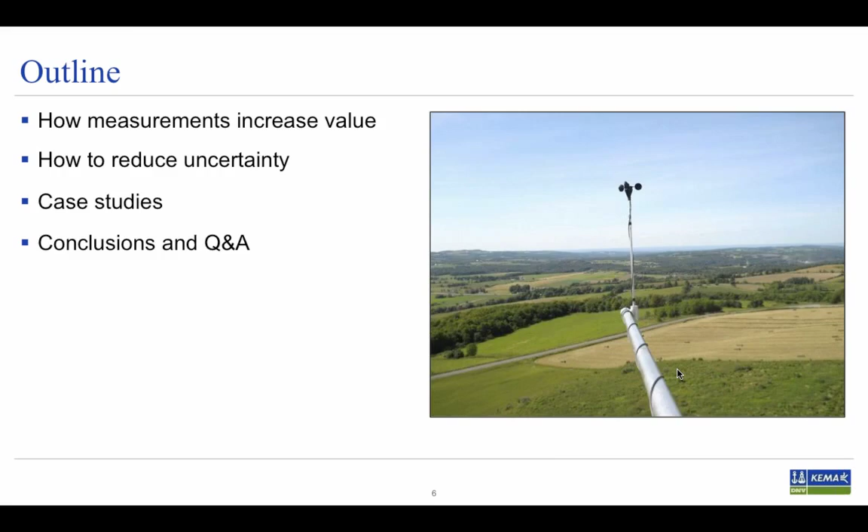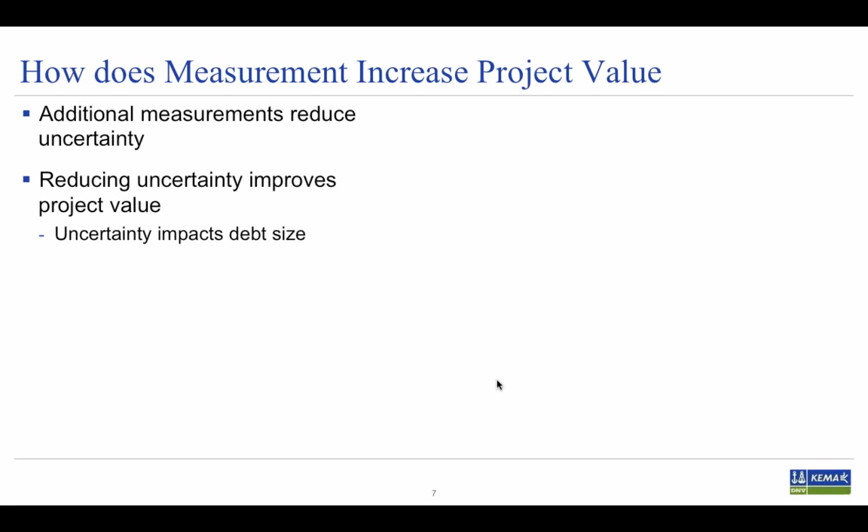So how does measurement increase project value? It does so because when you add measurements, you reduce uncertainty, and when you reduce uncertainty, this improves project value. Specifically, if you're financing a project, uncertainty impacts the debt size.

Specifically, typically a debt service coverage ratio of 1 is required at the one-year P99 level. So what that means is if you produce the energy production at the one-year P99 level, the revenue that comes from that level is matched to the amount of debt to be paid for your debt payments, for a particular size. So when those two factors match, you have a debt service coverage ratio of 1. So if you can reduce your uncertainty, additional measurements will increase the P99 to the next level.

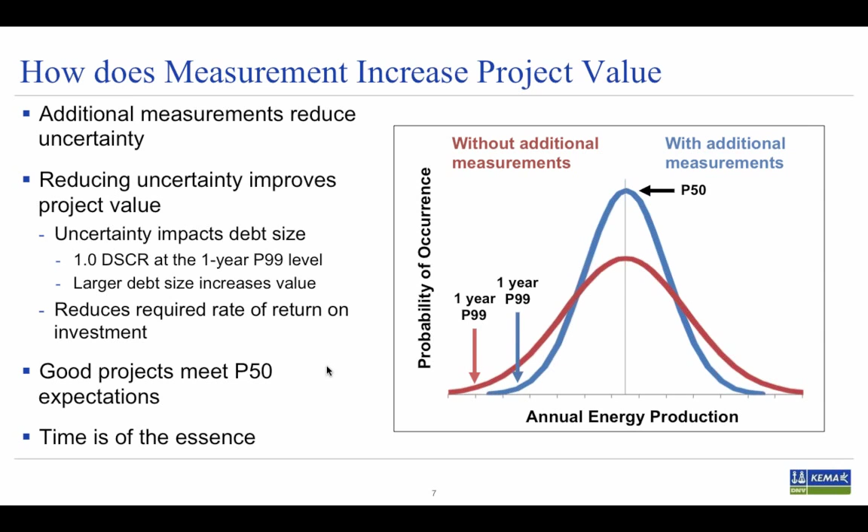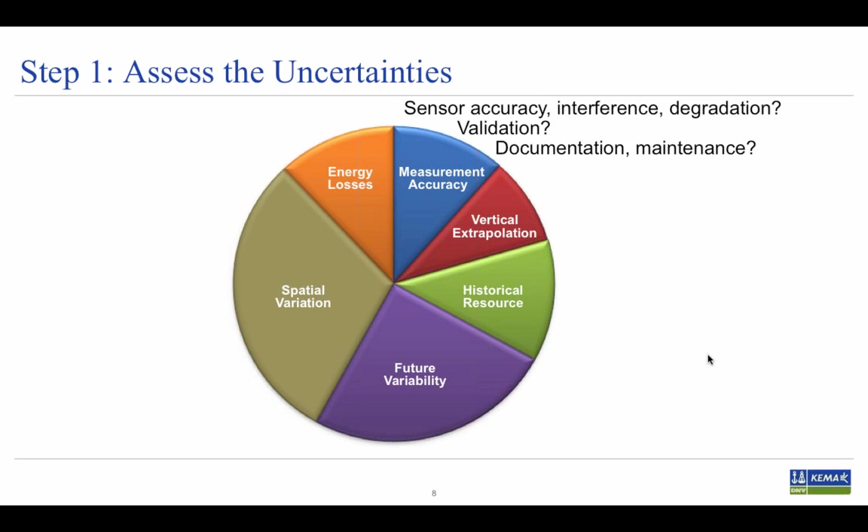First, looking at the measurement accuracy, you'll ask a few questions: What is the sensor accuracy? What interference might I have from tower effects or echoes from a SODAR, or is there any degradation? That will help define what the uncertainty is in the measurement accuracy. You'll also look at what validation method was used, check the documentation to see if it was well done and if there was maintenance, and that will help identify the uncertainty for that category.

The next category is the vertical extrapolation. This is the uncertainty associated with estimating the wind at the heights that you're extracting energy from. So you'll ask: what are the measurements at height relative to the hub height? What's the uncertainty in that estimate and extrapolation? And how well do I know the conditions across the rotor? Do I have measurements for that?

The historical wind resource uncertainty is associated with estimating the long-term average wind speed. You'll want to assess this through the measurement duration you have on site. You may be using correlation to reference data to extend your wind period to represent a longer-term average, and you'll want to make sure that's a consistent reference site.

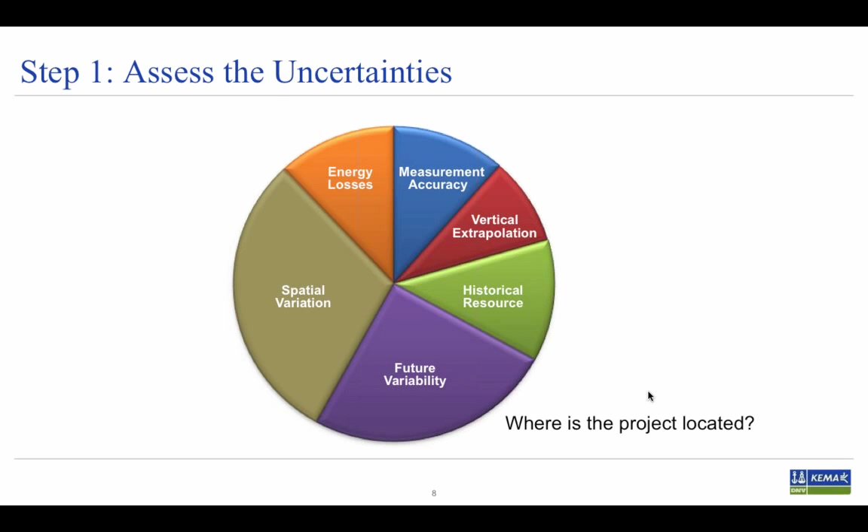Future variability is another uncertainty. It represents the fact that we don't know what the wind will be next year—it could be a high or low wind year, which adds uncertainty to the energy production estimate. It's usually defined based on where the project is located, since certain regions tend to have higher or lower annual variability.

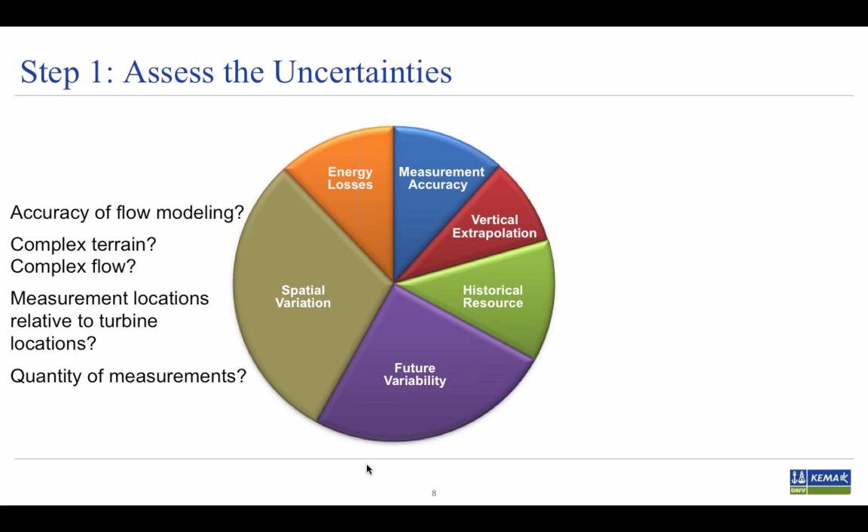The next category is spatial variation. This is the uncertainty of estimating the wind flow across the project. It's dependent on the quantity of measurements and how representative those measurements are of the project and turbine locations. You'll also consider the complexity of the terrain and flow, and the accuracy of your flow modeling to assess this uncertainty.

Energy losses are another uncertainty. You'll look at all the losses here and determine what uncertainty exists around those factors.

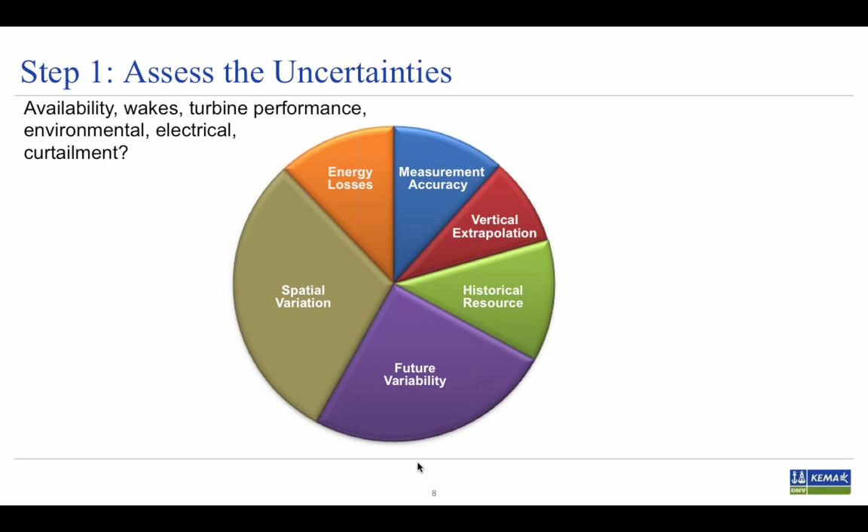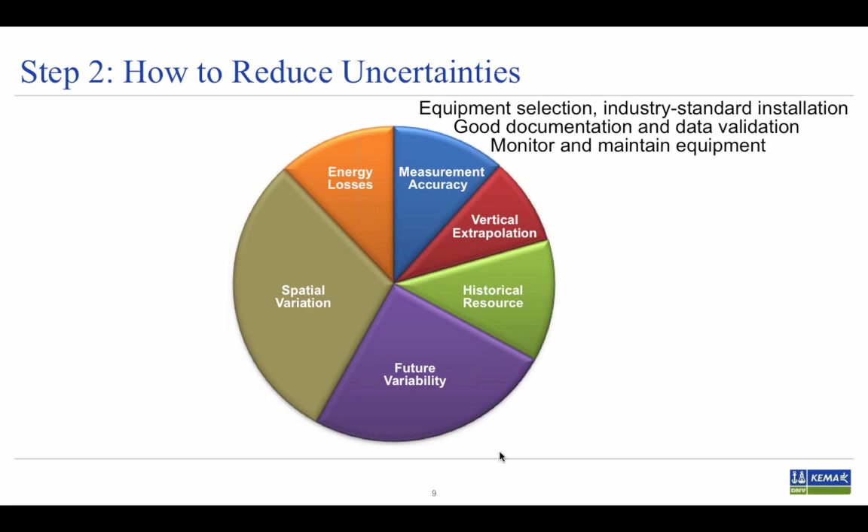Once you've assessed the uncertainty, you'll want to look at what you can do to reduce it—that's step 2. For measurement accuracy, things you can do include properly selecting equipment for your site, using industry standard installation techniques, ensuring good documentation and sound data validation, and monitoring and maintaining the equipment. That's how you would address that issue.

To reduce vertical extrapolation uncertainty, you'll want to make sure you're measuring higher and across the rotor—that's the best way to reduce it.

The uncertainty of estimating the long-term wind resource is addressed by measuring longer. It can also help to overlap your measurements with other towers nearby. For example, if a few miles away you have a project under development with a 7-year tower, you'll want to overlap those measurements in time at your new site so they can be used to extend the period of record.

With regard to future variability, you can't do anything about it—it's not within your control. The wind will change, and that's just a matter of fact, so you identify it and move on.

But you can address spatial variation, and you do that by measuring in more locations and measuring in representative locations.

With regard to energy losses, that's a hard uncertainty to address in the pre-construction phase. What helps is measuring across the rotor, since that gives more information into what the wake losses will be at the site—knowing those conditions helps. Otherwise, a lot of these energy loss uncertainties are mitigated contractually.

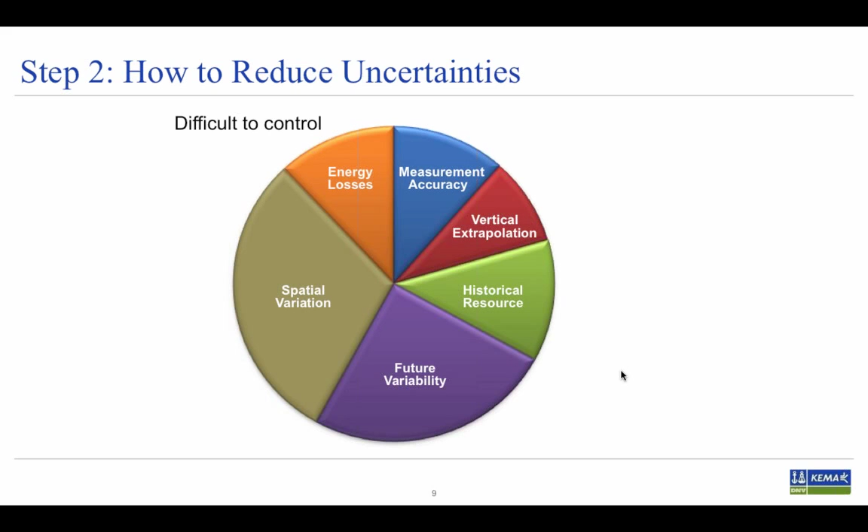So now you know what you can do to reduce uncertainty. How do you get to a good, effective plan? Step 3 is to focus on reducing the largest uncertainties, because that's where you'll get the most value out of this process.

On the left here is a pie chart showing a breakdown of wind speed uncertainties for a particular project. In this case, there's a large spatial variation uncertainty. When you look at how that spatial variation uncertainty impacts the overall energy uncertainty, you get a pie chart that looks like this—you can see the spatial variation uncertainty has grown its piece of the pie.

Why is that? When you combine uncertainties on wind speed, you square them. When you square big numbers, they get bigger; when you square small numbers, they get a little bigger, but not as much. That's how larger uncertainties end up having a disproportionately large impact on overall energy uncertainty. So for this site, addressing the spatial variation will get you the most uncertainty reduction and the most value.

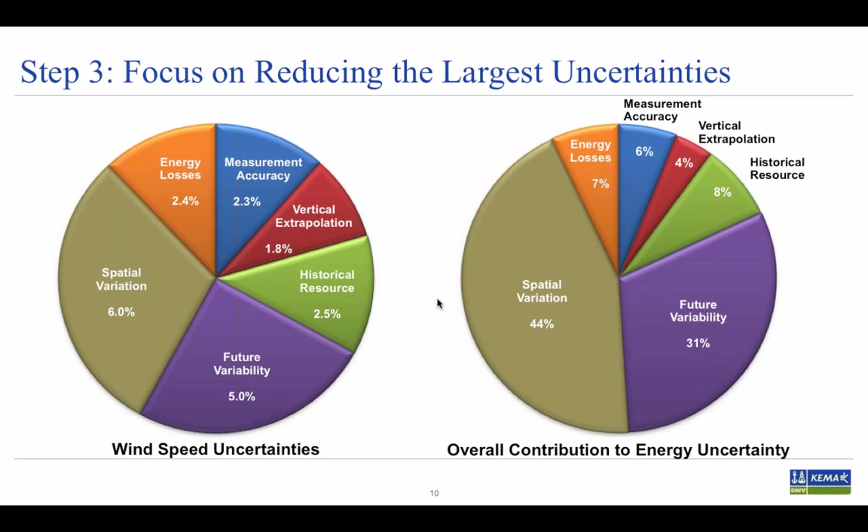Before getting into some case studies, let's dig a little deeper into vertical extrapolation and spatial variation uncertainty, since these tend to be the largest uncertainties for projects, but also the ones you have the most control over and can reduce through measurement. Vertical extrapolation is becoming a bigger issue, mainly driven by the fact that shear and veer across the rotor are now better understood through tall towers, SODARs, and LIDARs.

And what we're seeing is that there are some pretty interesting shear profiles that are going to affect the production. And if you don't measure that, you won't know what the production is going to be like.

So as we're seeing taller hub heights and larger rotors, this effect is exacerbated a little bit. As illustrated in the figure on the right, the Met Tower, 60 meters in this case, only reaches a fraction of the rotor span of this 100-meter hub height tower.

So you would probably estimate a shear profile that looks like this, but in actuality, it might look more like this. In certain conditions, particularly stable conditions, we're seeing that the shear profile we would typically estimate isn't what is actually going on. So you'll want to make sure you have measured that so you can account for it properly.

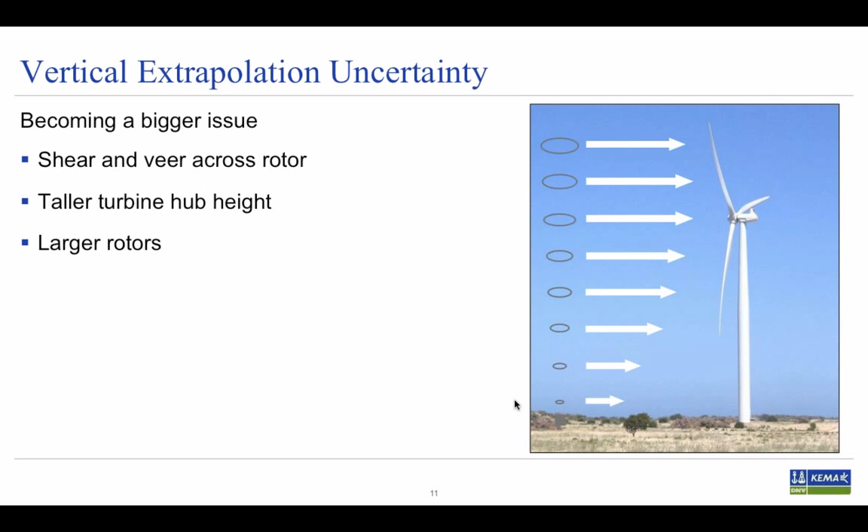Another important uncertainty is the spatial variation. It's one that tends to be large at some projects, and you can address it by adding more measurement locations. We estimate the flow across the site using modeling, but those models will need good inputs, so that's why you'll need to measure in multiple places.

Modeling is good, but it can't do miracles. So that's why we really encourage measurements in order to get any reduction in that category.

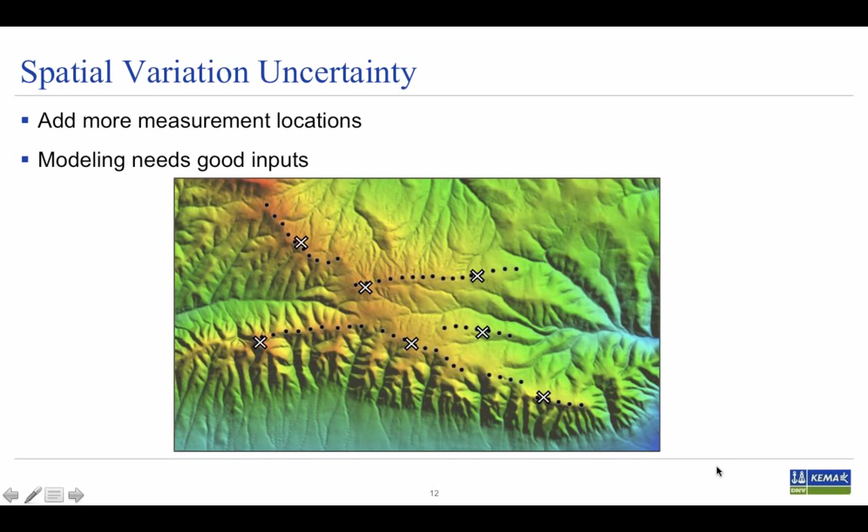So let's take a look at some scenarios and case studies. We'll look at two: one is a Midwest site with a 100-meter hub height, and the other is a complex terrain site.

We will look at assessing the uncertainties. That's step one of the existing campaign: what's the situation, and then start looking at what can we do about it. How can we assess the potential measurement scenarios, and what uncertainty reduction will be achieved through those cases.

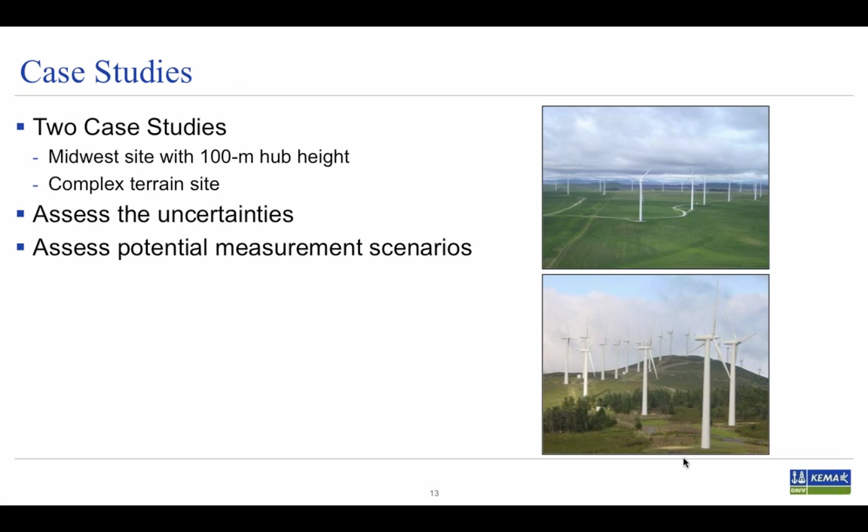We'll put that uncertainty reduction in a pro forma model and see how it changes the debt size and net present value.

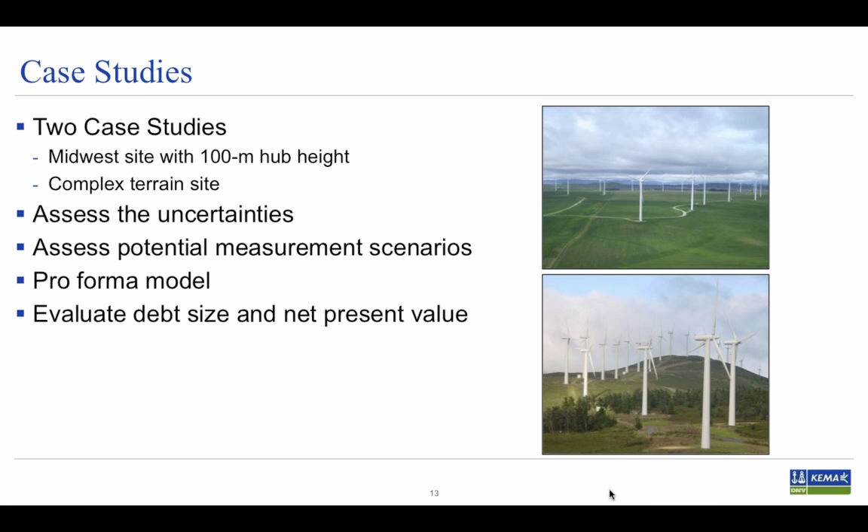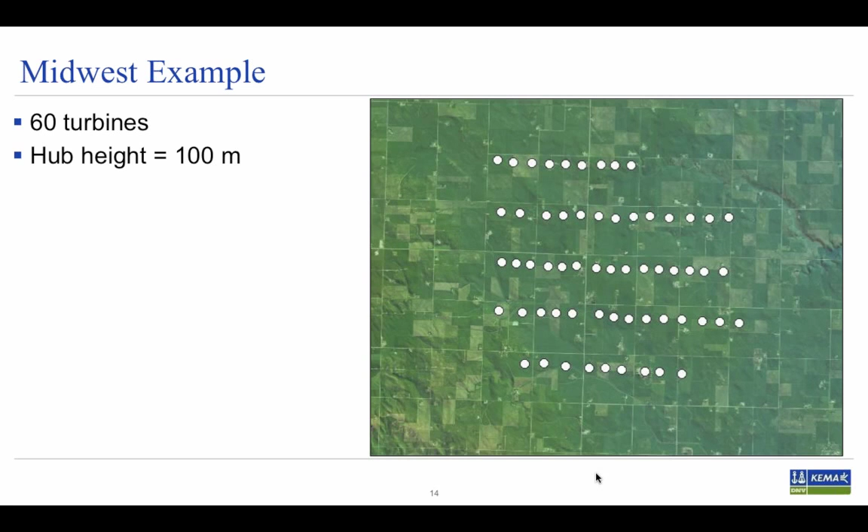So let's get started. The Midwest example is a 60-turbine project. The layout is shown on the right. It's a 100-meter hub height.

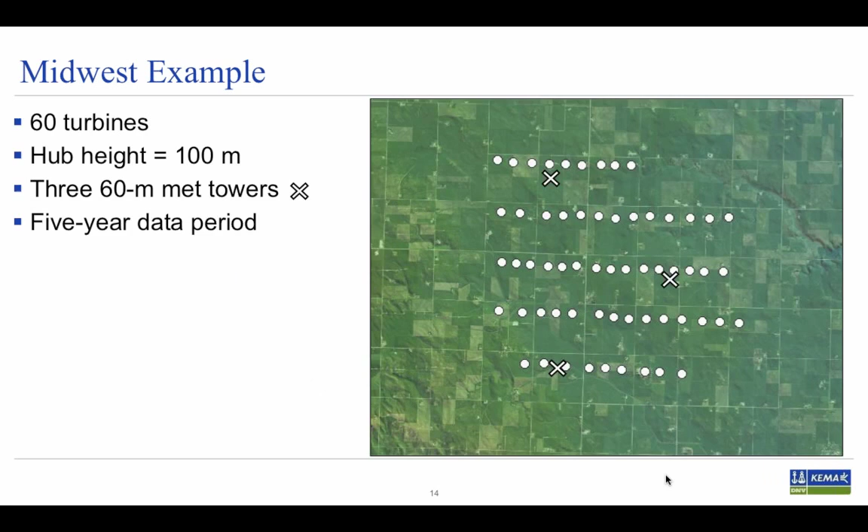Your first step will be to look at the overall uncertainties for this project. So here's the breakdown of uncertainties for this project. You would like to address the largest uncertainty because that's where you get the most value.

But unfortunately, it's the future variability uncertainty. You can't do anything about that. So you're going to look elsewhere.

The historical resource uncertainty is the next largest, but you've decided you're going to get this in the ground or start it this year to get the PTC. So you can't do much about that other than wait.

And then the vertical extrapolation uncertainty is pretty high here. So let's address that. And how can you do that?

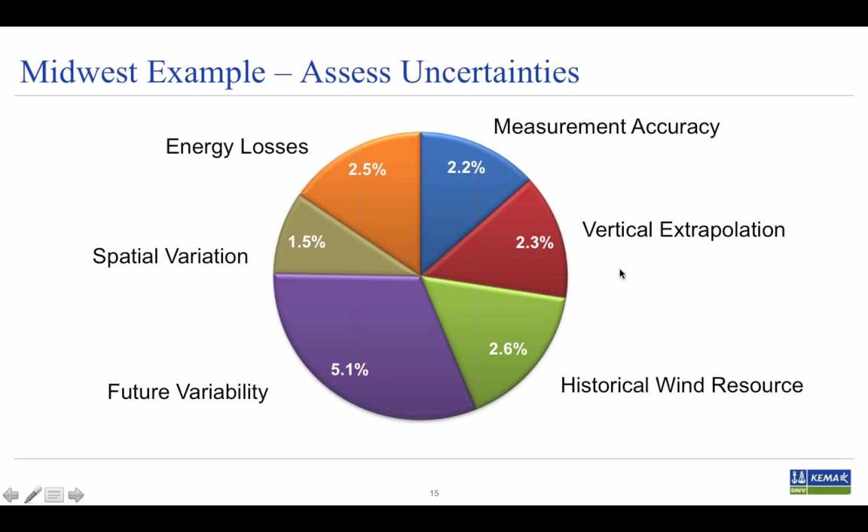Let's look at some measurement scenarios. You can do nothing, just continue measuring with your existing campaign, which would be the base case scenario that we'll compare against. Or you can install a 100-meter hub height tower at this location.

You might be planning to do this already because you're going to conduct a power performance test, and so you're going to need that hub height tower anyway. Or you may want that tower to be the SCADA tower for operations.

Another scenario, you could look at renting a SODAR for a year and putting it here. It could also turn into something that you use for the operations phase.

Or there's a third option: maybe you just want a shorter rental and see what that looks like if you just rent the SODAR for 6 months. So those are the scenarios. Let's look at the results.

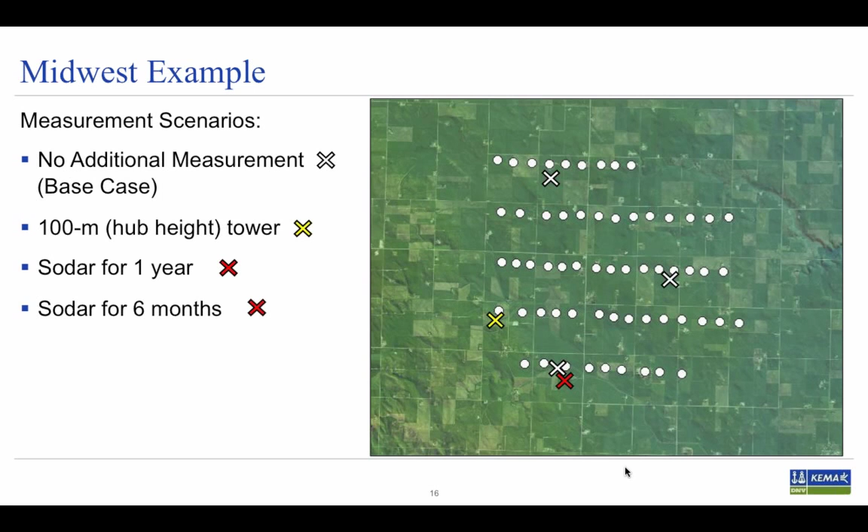What is shown on this plot is the incremental cost that you spent for the measurements, including the equipment and the analysis and monitoring, and then the incremental value, or the change in net present value compared to the base case, shown in the red bar.

You can see the shorter term 6-month measurement had less than half the value, but it's also lower in cost. The Met Tower and the SODAR had very similar change in value and a little bit different cost.

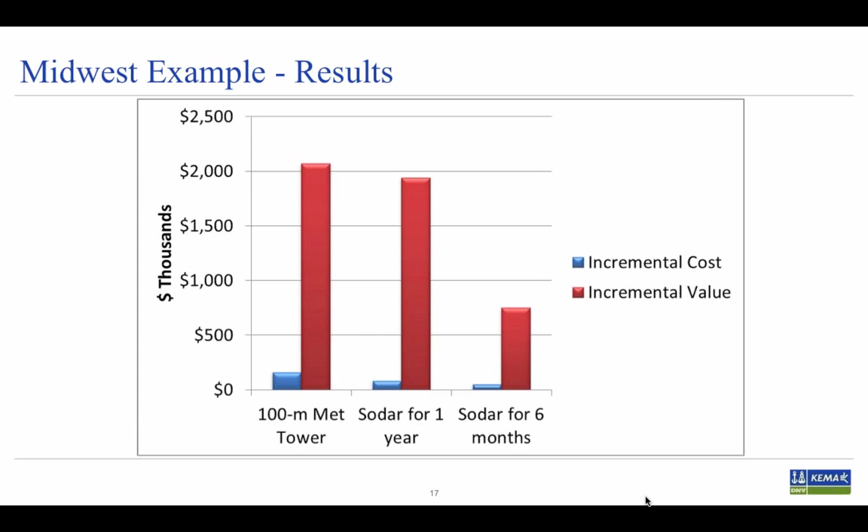You can see this presented in the next table. The top two rows are the values you saw for the chart before. The third row is the P99 P50 ratio, and you can see it didn't change much for the different scenarios, but little changes had quite a big impact on the debt size.

So here's the change in debt size in the last row relative to the base case. I'll get to the assumptions and the costs that we use in these scenarios at the end, but wanted to show you where we're going with this. So that's the Midwest example.

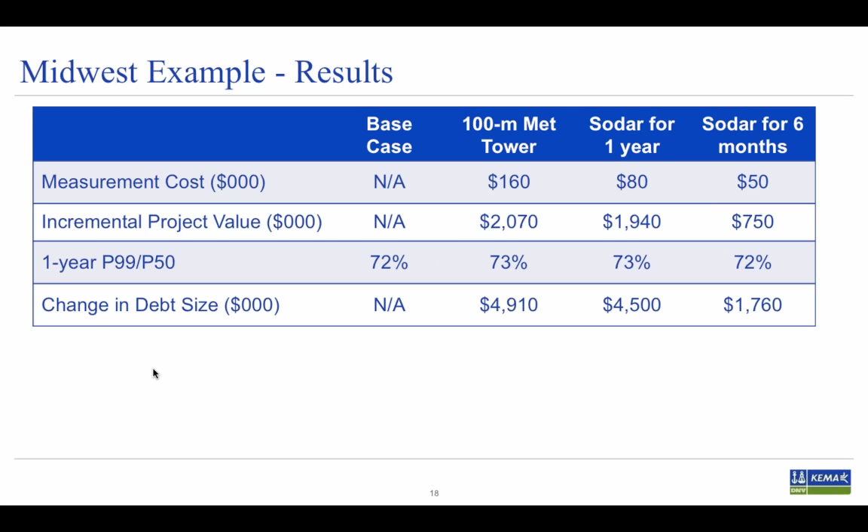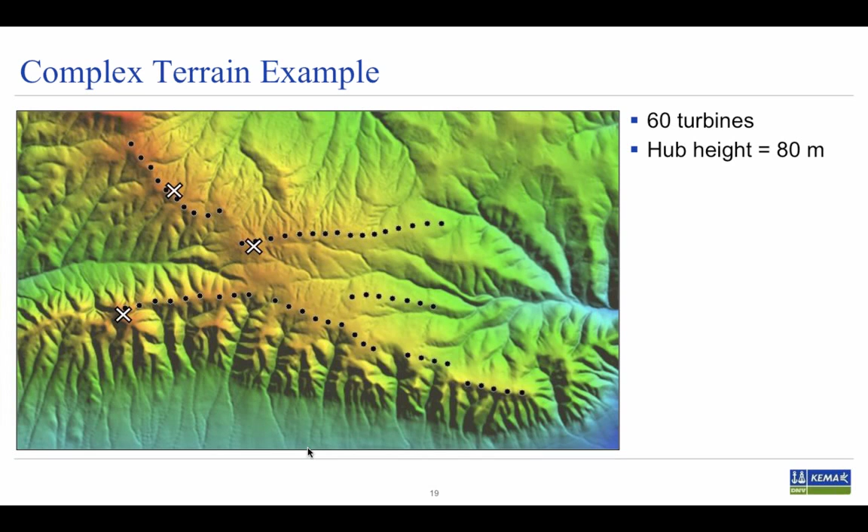Here's the complex terrain example. You have a project that looks like this, and there are three Met towers, 60 turbines, hub height of 80. They're all 60-meter towers so far. And you have a 2-year period at each of the towers, and you've been able to use a reference data set to extend that.

You might look at this case and say, wow, they really haven't characterized what's going on at the site, and you're exactly right. You might think, oh, well, this isn't a common case. In reality, we have seen projects with inadequate measurements going to financing, and they're not getting all the value out of it that they could. So while this may look like an odd example, it's not that uncommon, unfortunately.

You also get into this kind of situation where you have a few Met towers that don't fully represent the project when your layout changes due to environmental restrictions in one area where you plan on developing, or landowner restrictions. So your measurements should often move along with your layout as it changes.

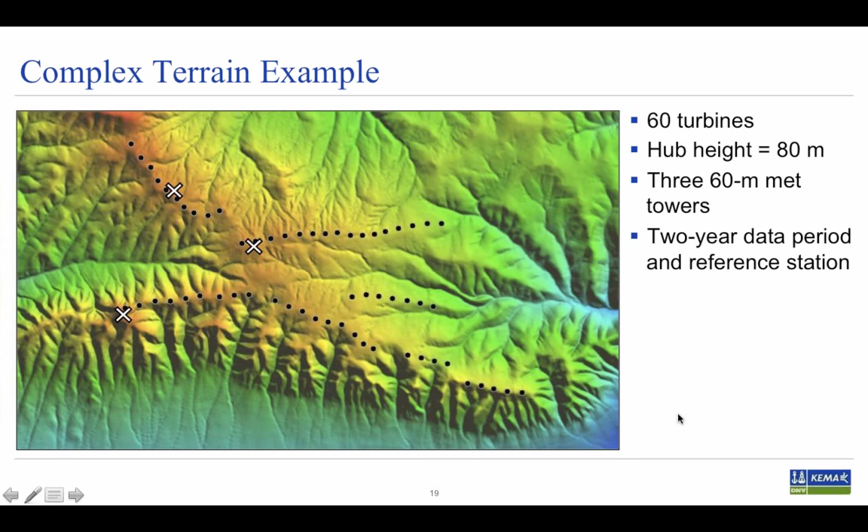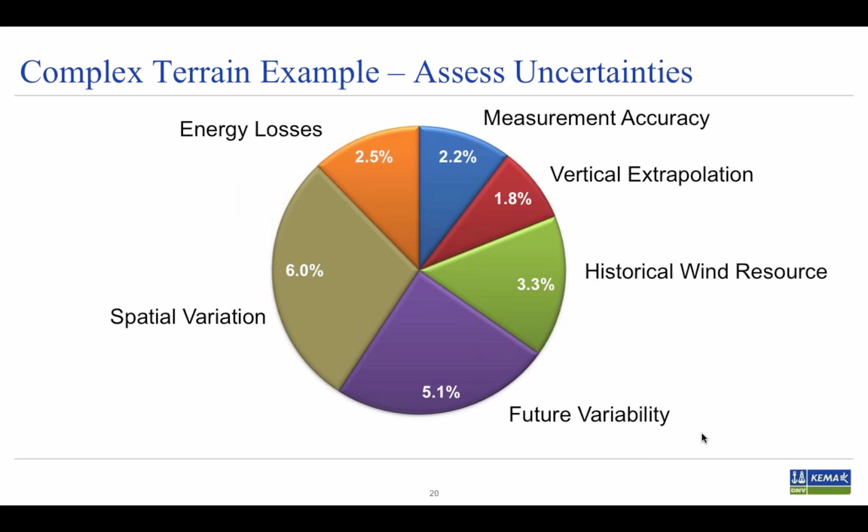But how would we deal with this project? How would we get more value out of it? We first start by assessing the uncertainties. In this case, the spatial variation is the largest uncertainty, so you're going to try to address that. And we'll go through the measurement scenarios that you would do to address that.

In this case, we're looking at installing one additional measurement, or two, or three, or four measurements. These measurements could be towers, SODARs, LIDARs, depending on what you've got going at your site, the conditions — you might pick one over the other. In this scenario, I'll go through the Met Tower case. If you just added one to four 60-meter Met towers, how does that change your project value?

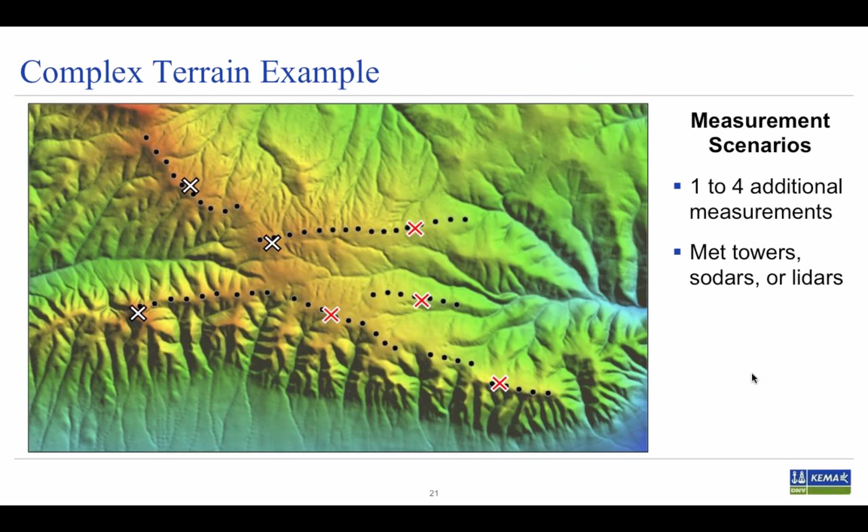It's really hard to put down cost and measurements up front, particularly if you're not sure the project's going to go through. But in a lot of these cases, when you're getting close to building a project and you're confident it's going to go through, putting that cost into measurement, while it is at risk, it's not that much of a risk. So especially as you're getting close to finishing a project is when you want to start thinking about what measurements can I throw at it to eke out that last bit of value?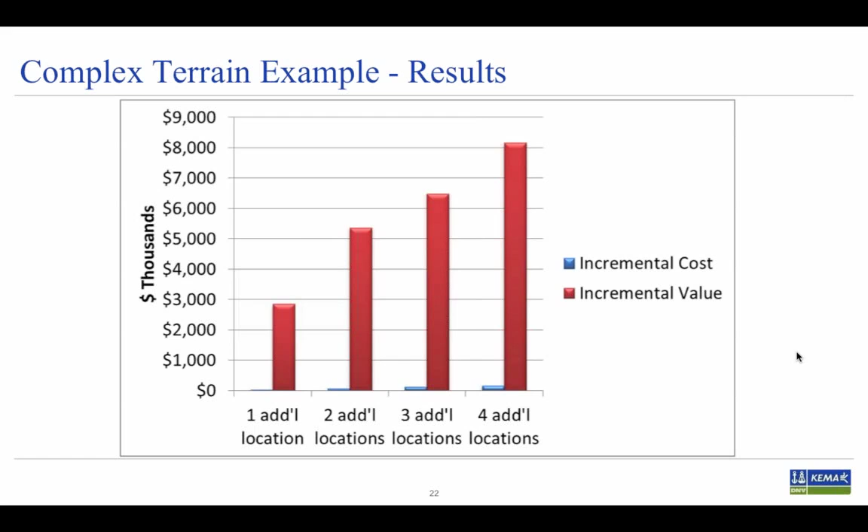This next table shows these values for the plot. Here you can see the P99, P50 ratio changed a little bit more in each case because we started with a pretty uncertain project and was able to continue to reduce that uncertainty. And we're also showing the change in debt size relative to the base case. So you can look at these if you'd like.

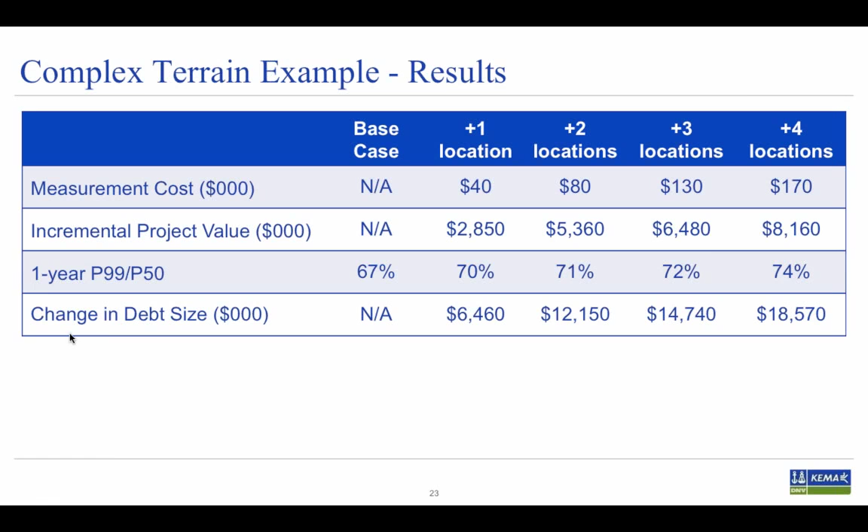There are diminishing returns to this. You could measure at every turbine location, and that would be great, but expensive, and at some point you start losing the value. So this plot shows that with each additional measurement, your uncertainty is reducing to a point. At about 4 or 5 additional towers, in this case, or SODARs or LIDARs, you wouldn't be reducing the uncertainty that much more with each additional measurement.

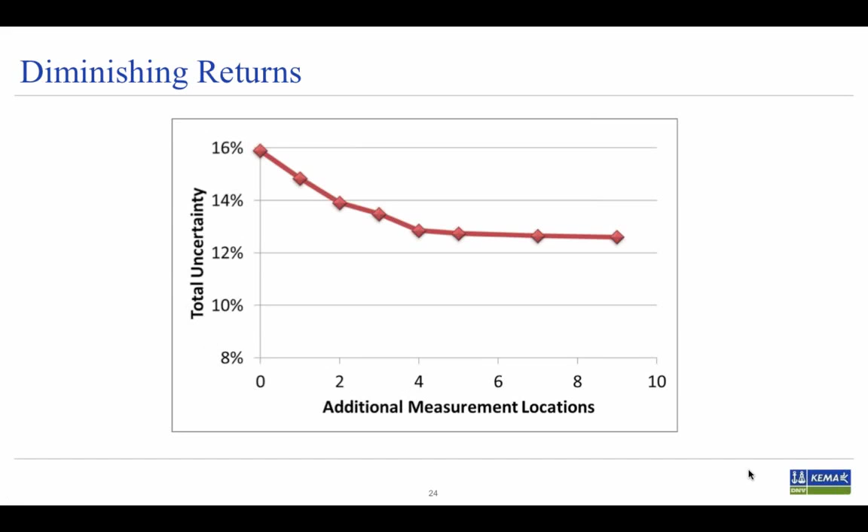And why that is — you're probably reducing the spatial variation uncertainty, but you're running into some other uncertainty that you're not addressing. So you've gone from the spatial variation uncertainty driving the uncertainty analysis to some other factor. So you might start looking at that. But there are other reasons why you would have potentially diminishing returns. And this plot shows the change in your P99, P50 ratio on the x-axis.

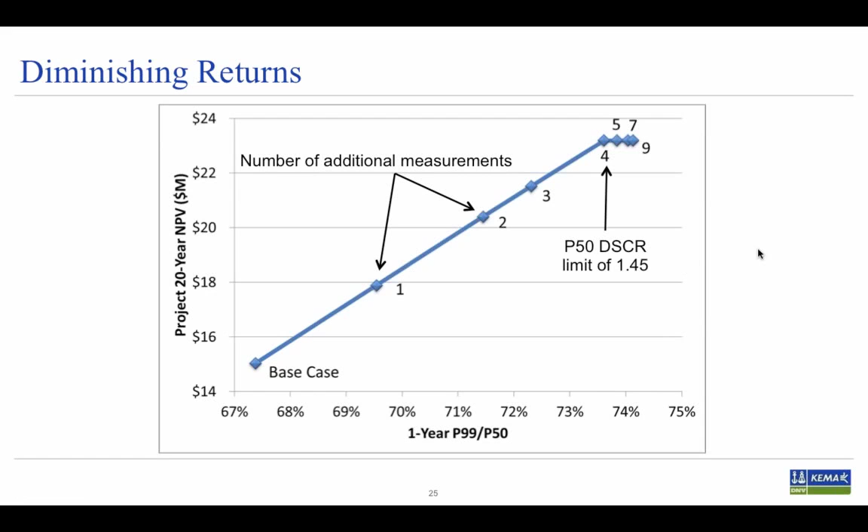So here are the assumptions I promised you on our cost-benefit analysis. It's a 20-year project life, leveraged IRR of 14%, a discount rate of 12% for the values we showed you here. But we looked at a broad range of discount rates, and in those cases, the value of the measurements was positive over that range of discount rates. But it's something you want to look at on a case-by-case basis. We talked about the debt service coverage ratio limits. We used a 5.5% interest rate and a debt term of 17 years.

The cost assumptions are shown here, and then we provide a kind of typical industry range. Of course, these costs will really vary based on the location, what you're buying, all sorts of things, but we wanted to give you some information you could reference if you wanted to get a sense for variation in costs.

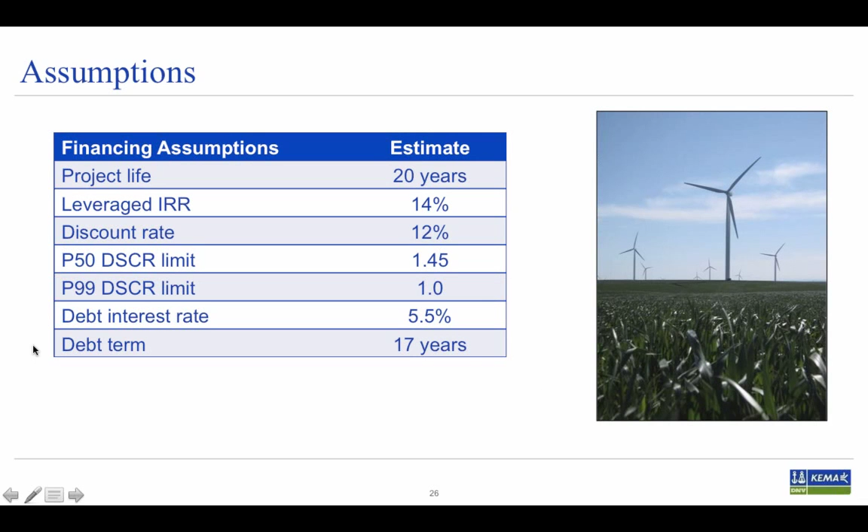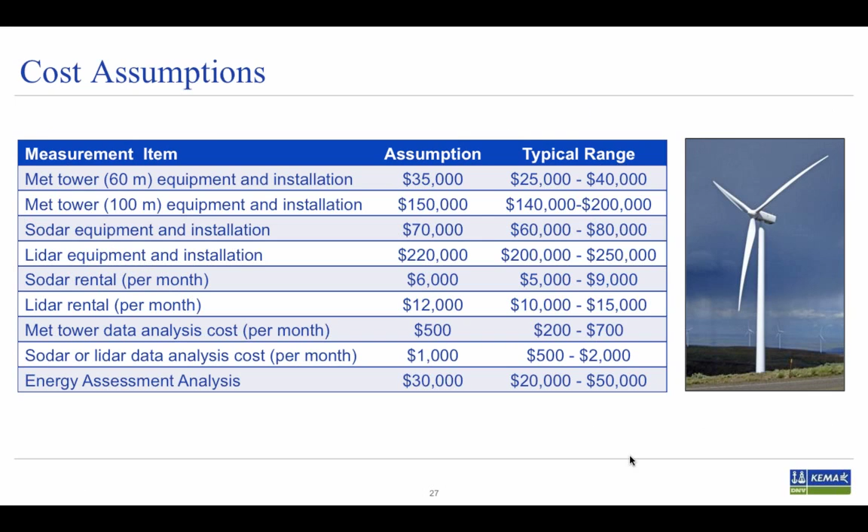And now the key takeaways, things I want you to come away with. The step to how you improve your project value is you first start by assessing the uncertainty. You'll then want to focus on reducing the largest uncertainty. That's the most effective approach. And how you do that is you measure longer, you measure higher, and you measure in more locations. And you'll want to look at this and conduct a project-specific analysis.

This is something we can help you with. If you want help understanding what the uncertainties are, how they would change with additional measurements, we can help you with that. We also can provide measurement guidance, procurement, and installation of measurements if that's of interest. And we can do this cost-benefit analysis to really see what project value you can reach and how to get that.

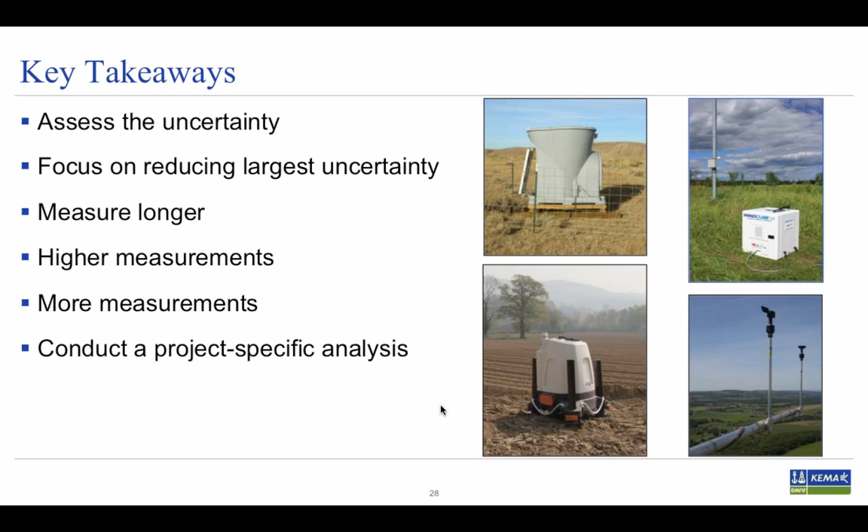So the takeaways and conclusions: increasing measurements reduces uncertainty. Reducing uncertainty improves project economics. We've looked at a lot of cases. We've just shown a few here, but the economics are pretty compelling in a lot of cases. And the time to do it is now, particularly for those PTC projects, you'll need a year of measurement to really get that value out of the project if you're going to finance it next year. So let's get this going and let us know if we can help.

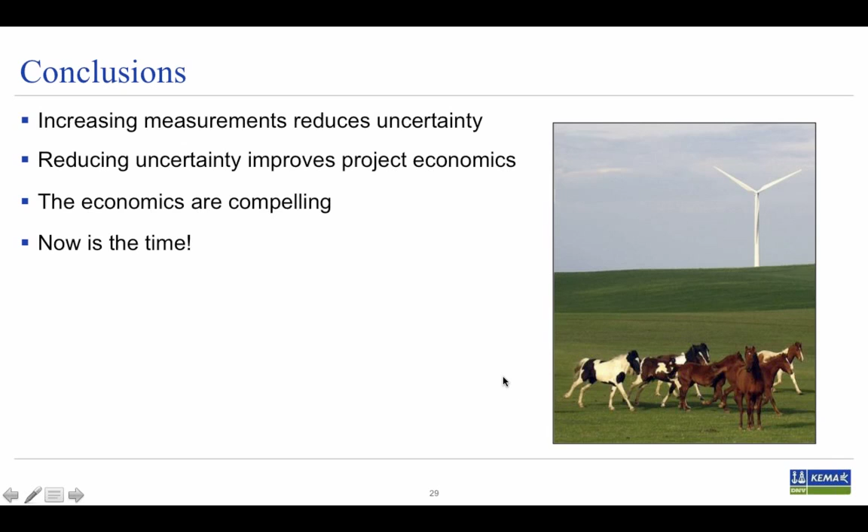The first question is, how much does the measurement accuracy typically impact the overall uncertainty? For example, does it pay off to use more expensive but more accurate anemometers?

Yeah, to answer that question, having a good, maybe spending additional money on first-class anemometers is good, but often that may not be what's driving your uncertainty. If you have a project that has 60-meter towers and 100-meter hub height, for example, you'll really want to address getting taller measurements, because that's probably what's going to be driving the overall uncertainty. But you still want to make sure that all your other equipment and your measurement accuracy is good. But often it's really a case-by-case basis, and you want to focus on getting the most reduction by the proper measurement method. In some cases, that's anemometer accuracy and addressing that. In other cases, it's more towers.

For the Midwest example we showed here, we looked at how the measurement uncertainty, if you reduce that, what the overall change would be. Because there was fairly low uncertainty under the other categories, if you did have a good quality measurement system and good maintenance and good data, that would really drive the uncertainties. So in short, yes, it's good to make sure you're using good quality data, and a lot of times it's just making sure whatever you're using, you're monitoring it and maintaining it. But also don't forget there's other uncertainties to focus on.